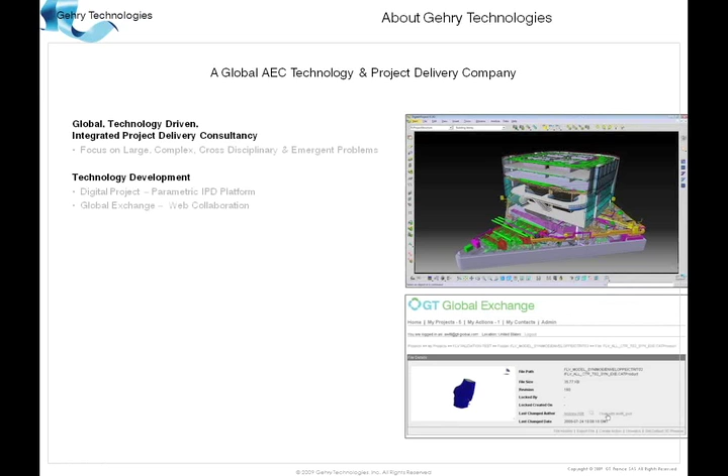We develop some building information modeling technology and communications software, and then next we are involved in both academic and industry initiatives, serve on some of the panels regarding interoperability, and try to foster the community of collaboration around AEC and BIM. Next.

Our processes tend to be a hybrid of consulting and services, and we're always looking to define the systems underlying complex project delivery problems, and we approach that through, again, hybrids of our software, other commercial software, and consultancy, both technology transfer and also integrating in the project team. And I think the World Trade Center work is going to be a good example of that kind of approach. Next.

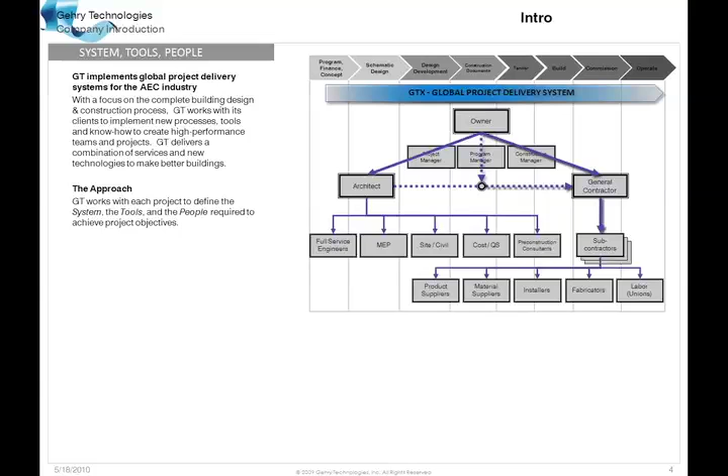Just briefly, we serve our projects through a broad international presence. So, of course, due to the international flavor of many projects, where design may be conducted in New York or Paris or London, but actually executed in Asia or Abu Dhabi or the Middle East, that's really one of the strengths of our approach, to be able to cover the world and the cross-disciplinary and distributed project teams.

Just some of the sectors that we're involved in. We're relatively well known for work on the complex building types, including our heritage, the Frank Gehry work, but also many other projects, including what's shown, the Beijing Olympic Stadium. We do other large commercial projects, as shown on the right, large infrastructure, often mixed use, where there are complexities either of scale or performance or

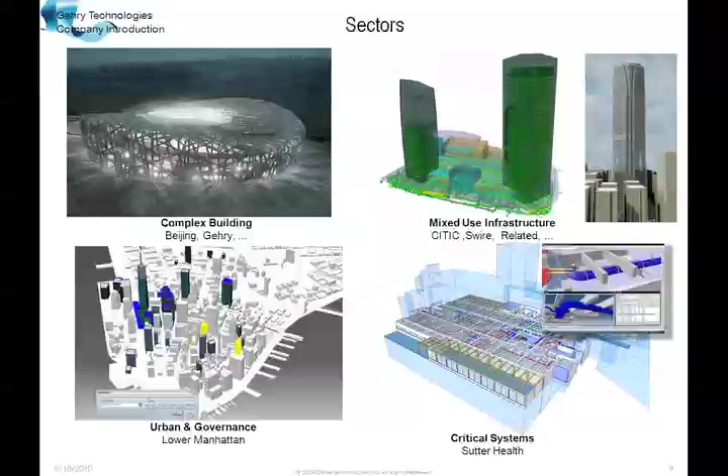geometry. We've been getting involved also with some of the more critical systems types of projects, hospitals, data centers, and the like. And then at the larger scale, again, what we'll show you regarding the World Trade Center work is really trying to take BIM to the urban and global level, and some of the overarching governance and management issues around it. Next.

And then downstream, project controls, construction logistics, sort of virtual design and construction work. And then always looking at the overarching governance and information management side of things, really sort of managing the data through the integrated project delivery ecosystem. Next. That's all I have.

I'd like to turn it over to Tarek, who is going to focus in on one of the projects we've been involved in that we're very excited about. I want to also, just in passing, thank FIATECH for the opportunity to speak today and for recognizing this work as you did in March, and also clearly our sponsors at the LMCCC and the very broad set of collaborators in New York City that we're working with to undertake this work. And with that, I'd like to hand things over to Tarek, who's going to take us into the case study itself.

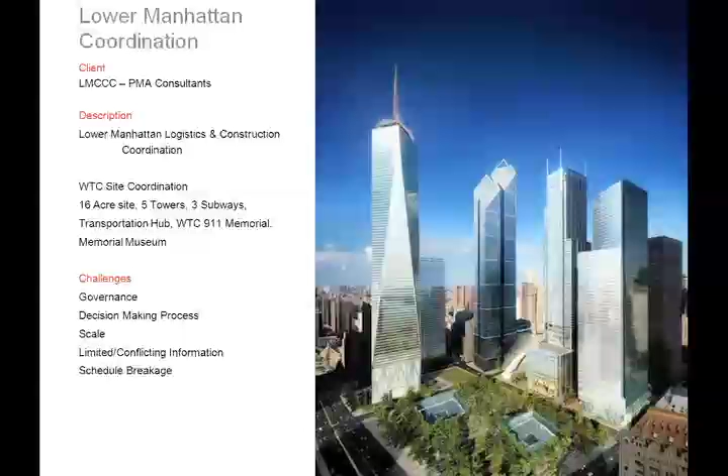Our client at the Command Center is the Lower Manhattan Construction Command Center, which was chartered by the executive orders from the governor of New York and the mayor of New York City. Its mission is to coordinate and communicate and mitigate impacts of construction on the community and amongst the construction community as well.

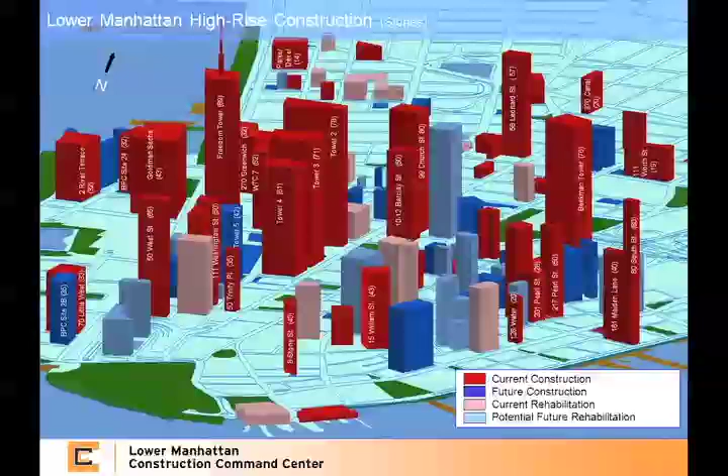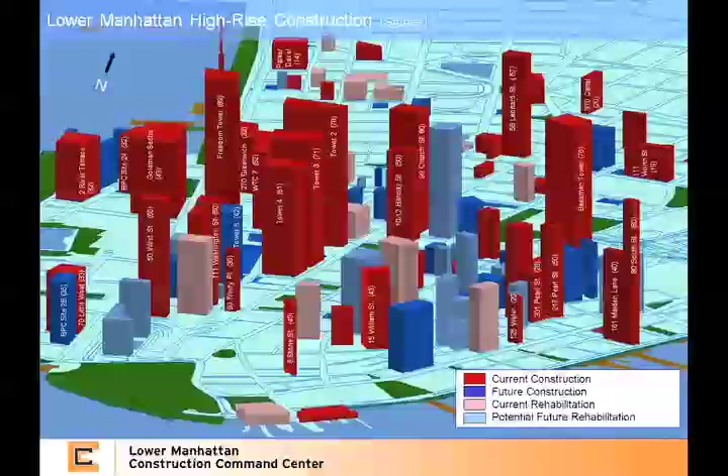Since 9/11, the flow of public investment in redeveloping Lower Manhattan, a lot of private funding as well, funneled into Lower Manhattan. From 2002 to date, there's about 150 new construction projects. Some of them have been slowed down due to the economic crisis the last couple of years. But what you see here in red is basically current construction projects in Lower Manhattan,

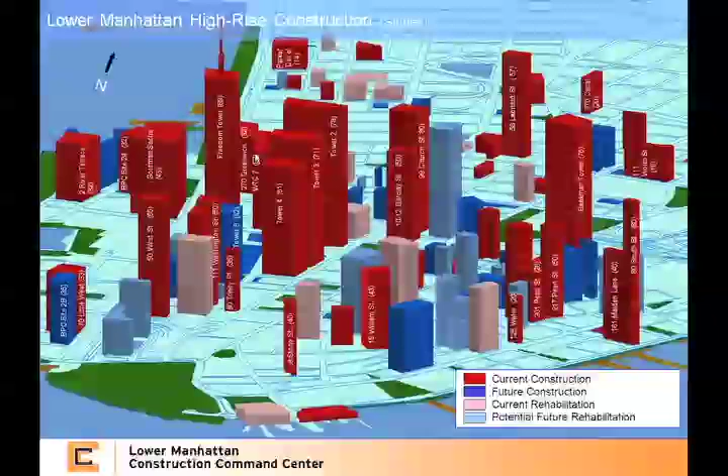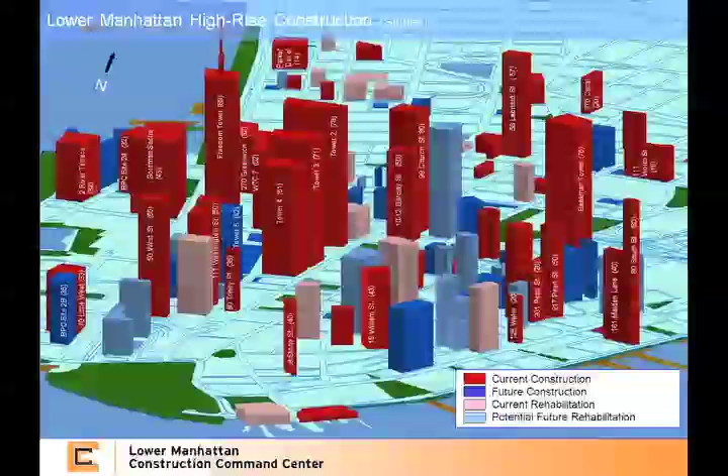and that's all around the World Trade Center site. If you can see my pointer, this is the location of the World Trade Center site, which is shown by the Freedom Tower, Tower 3, 2, and 4, and in between here, within the 16 acres, is also the Memorial and Transportation Hub that the Port Authority manages.

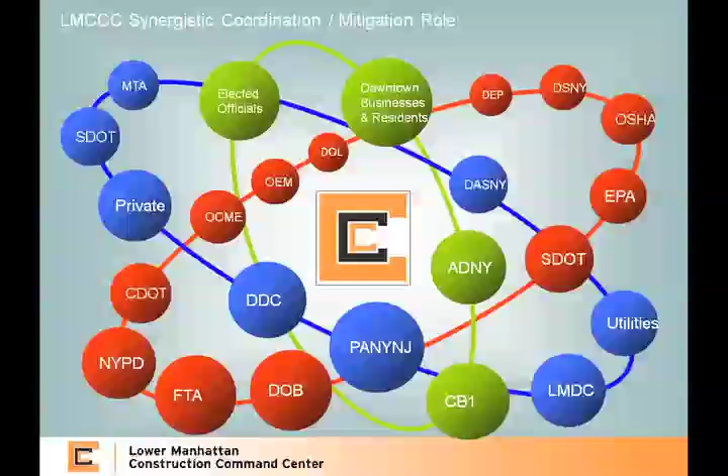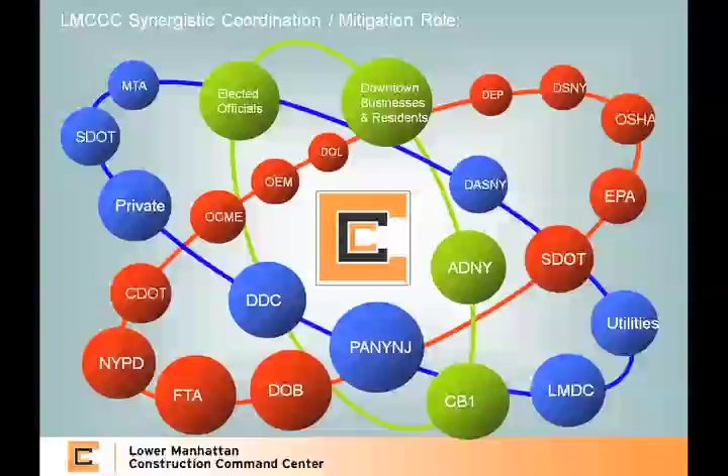The Command Center basically deals with 3 spheres of influence. What you see in red is the regulatory agencies that are involved in Lower Manhattan: State DOT, EPA, OSHA, DASNY, DEP, the FTA as a funding agency. What you see in blue is the construction community in Lower Manhattan. That includes the DDC, the Port Authority of New York and New Jersey, the Lower Manhattan Development Corporation. You have also utilities. The MTA has major projects, the state DOT, and the private.

A very quick review about risk management and its importance in this case. We're talking about the development at the World Trade Center site, which comprises about 16 acres and about $16 billion of program space. A quick review of all the mega projects. You can see there's a major cost overrun and schedule delays on these mega projects, and there are systematic and systemic characteristics in mega projects that are conducive to risks. Usually there's more than one stakeholder and there are multiple funding sources, which we see at the Trade Center site.

There are multiple programs and projects that coincide in space and in time. Within these programs and projects, there's multiple sub-projects, and the design is being packaged and developed at different stages and different timings. There are many contractors, construction logistics, and on-site, the interfaces between the contractors become very crucial.

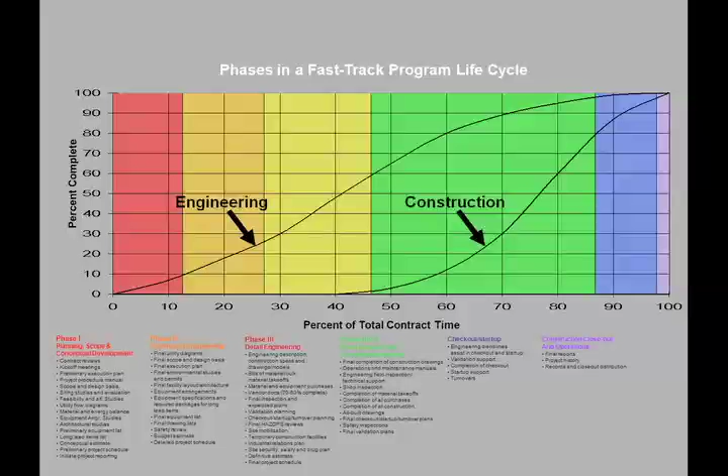There's fast tracking, packaging, early works, construction on piling or foundations, excavations. Slurry wall begins before completion of design. Then you have all the existing utilities and relocations and all that. A quick review of the life cycle of risk on a project. At the beginning of any project, risks are very high, but the amounts invested and the amounts at stake are very low.

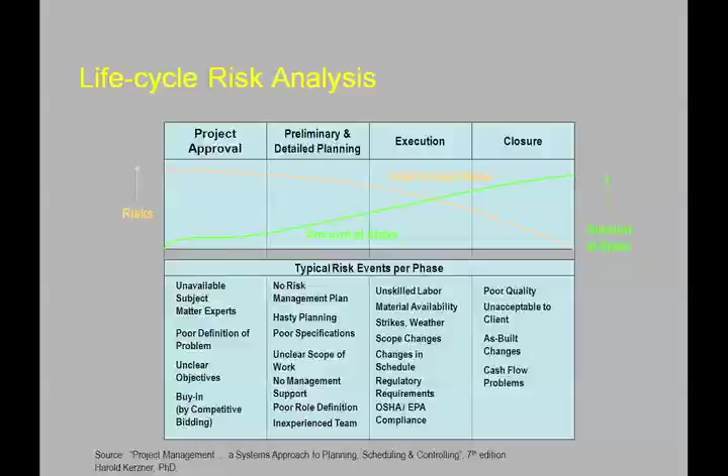On a program like the World Trade Center site with multiple agencies with varying timelines for the different projects, it's very critical. Early on, the Lower Manhattan Command Center adopted a risk management approach to the projects, identifying the project coordination risks, and basically it's a 6-step process with reviewing projects, identifying potential risks, modeling these risks for analysis, and then creating risk ranges, and we'll talk a little bit about that.

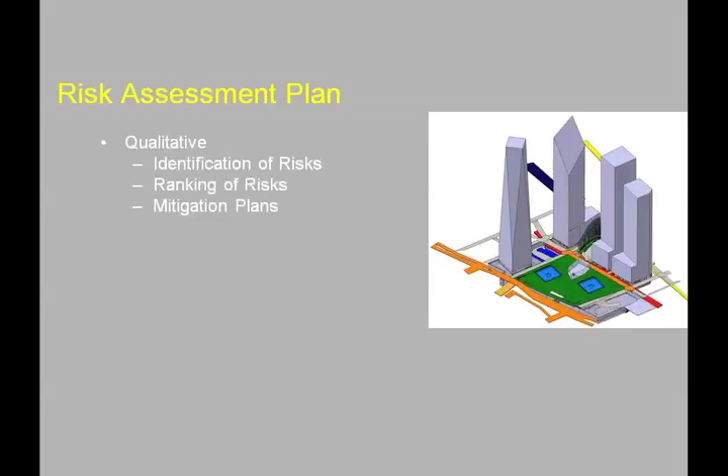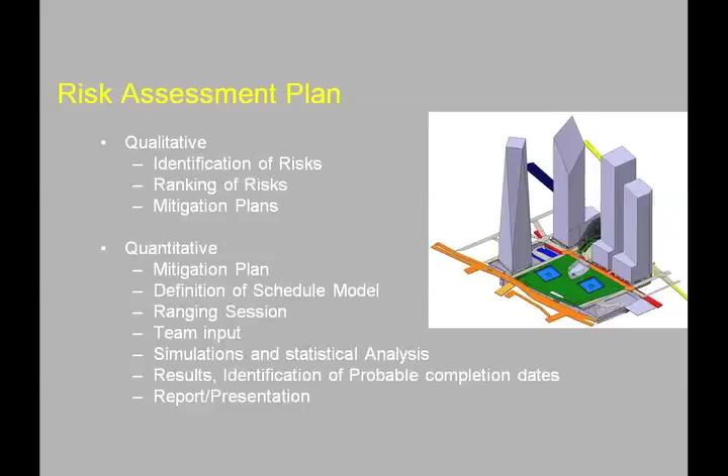Then we simulate and run the analysis and calculations and summarize the outcomes and results and basically manage the risk process. There are two aspects of the risk assessment plan. One is the qualitative aspect, identifying the risks, ranking them, and developing mitigation plans. The other is a quantitative assessment, which includes creation of a schedule and cost model, ranging these costs and schedules, and then, while soliciting the team's input, creating simulations and statistical analysis for these results, and then reporting the process.

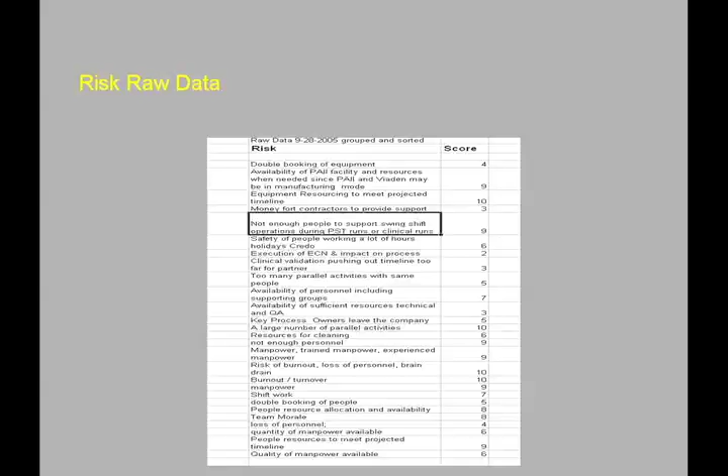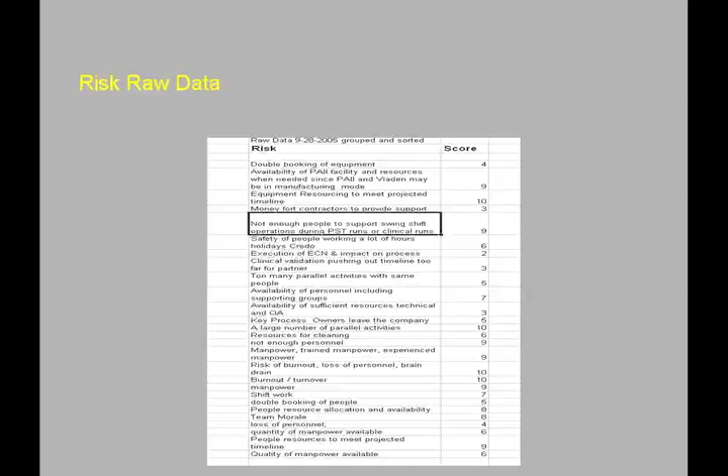Typically, we start with raw risk data. Basically, the team provides input on their potential risks. Now we're talking about multiple agencies. Initially at the command center, our expert team of consultants working at the command center, and Gary Technology was one of them, prepared what the command center saw as major risks between the projects due to coordination and due to interfaces between the projects.

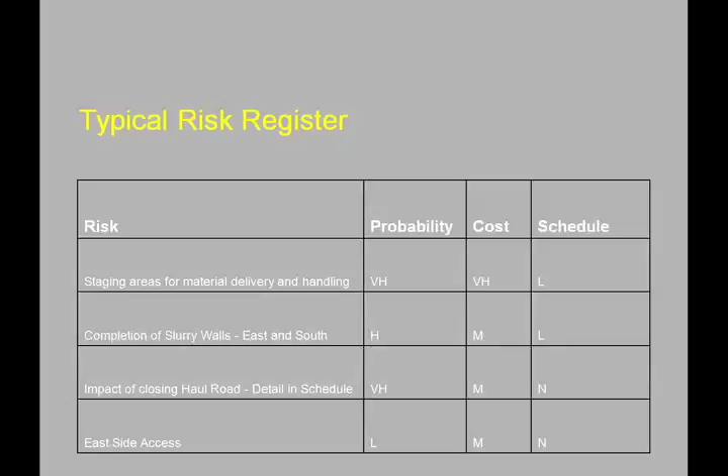A typical risk register would have a risk statement or a risk item with its probability and its impact on cost and schedule. These are basically subjective assessments with ranges. Probability is defined as very high, high, medium, low, very low, and the impact is also identified as very low to very high. And a score, and again, this is a very subjective scoring system, is identified based on the probability and the impact.

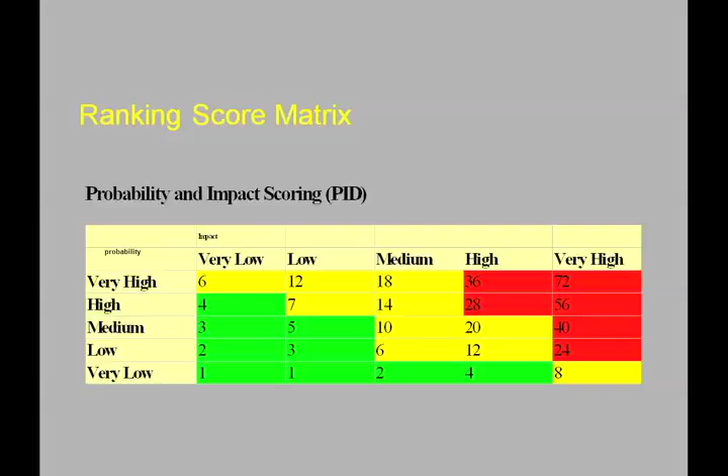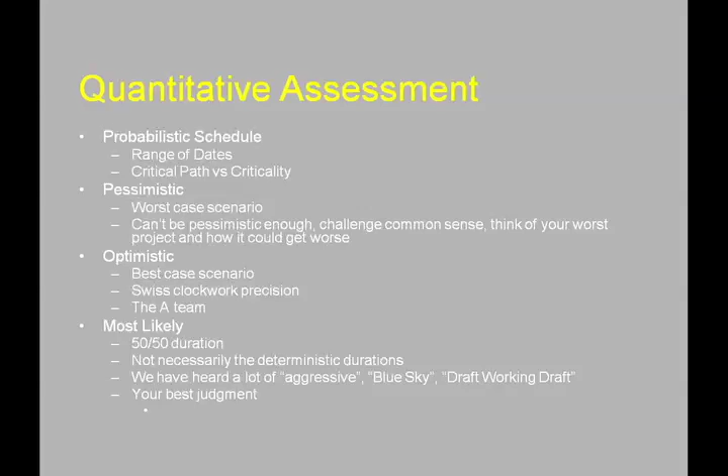One of the challenges we initially had was that the deterministic schedules were always qualified as aggressive. Some of them were blue sky schedules, drafts, working drafts. Basically, another way of saying this is very optimistic or very aggressive. So we had to deal with understanding what really went into activity durations.

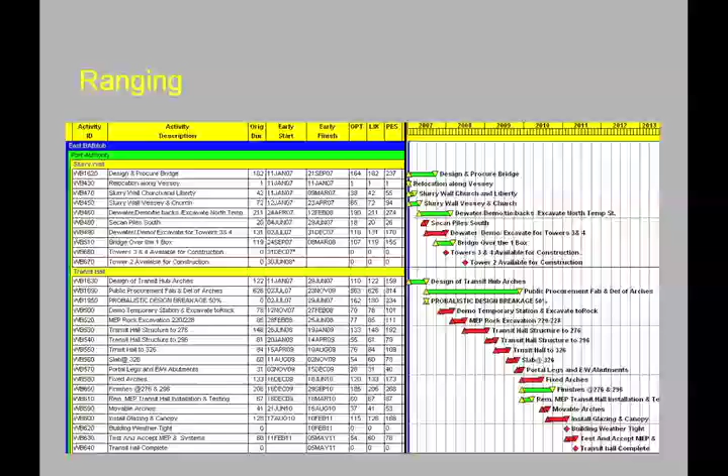The command center started analyzing the schedules and looking at the activities, providing these ranges, from pessimistic to optimistic and the most likely. And a Monte Carlo simulation basically randomizes schedule calculations, and we can run the calculation maybe 1,000 times, 10,000 times, and based on that we get a range of probabilistic dates.

Some of the dates have 100% probability, which are towards the tail end of the curve. Activities that have very little chance of happening are at the front of the curve, and in between is what would be the deterministic schedules or the standard schedules the projects are working with.

We have defined 80% probability on this project as the criteria for defining the amount of risk that is acceptable. So when we use the term P80 or probability 80%, this means that for a given activity or for a given project, it has a likelihood of occurring on or before that date 80% of the time.

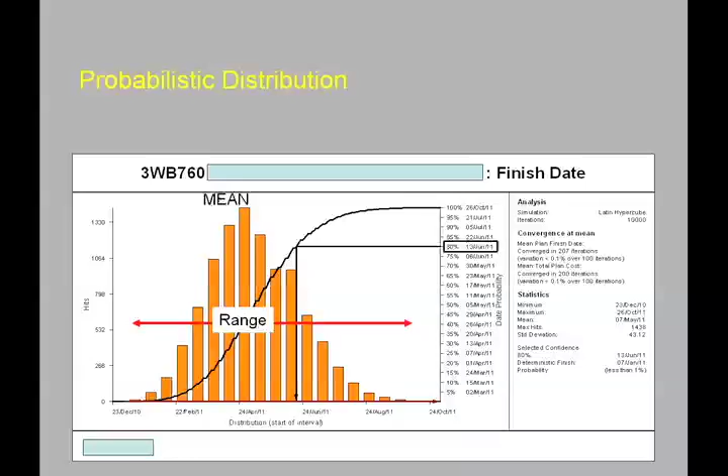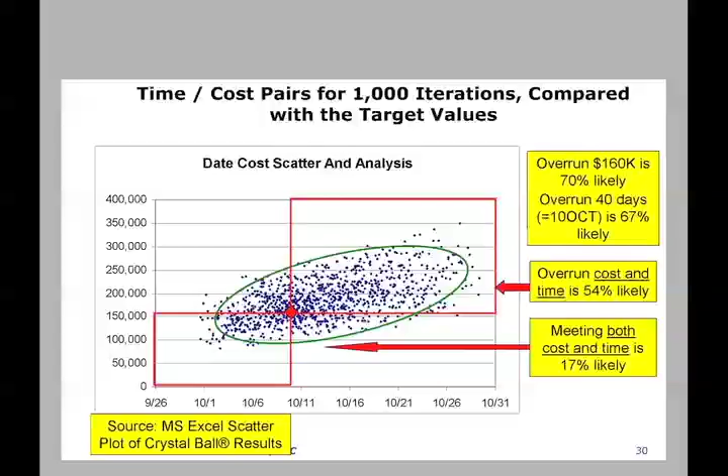So let me take you back in time to basically around 2006, and discussions were going on in 2006 forward, looking at what the site would look like on a memorial event in 2009: what kind of celebration, what kind of access to the site, what kind of construction status would the site be in. And that was a question posed by the governor and the mayor to the executive director of the command center.

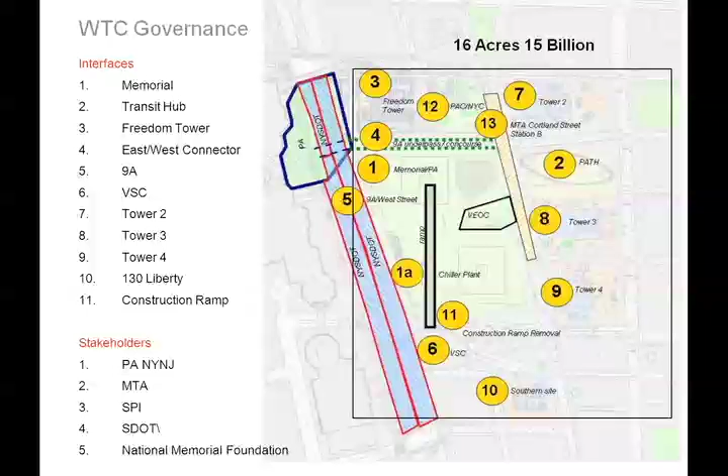And basically there were different responses from different agencies. There are about 13 major projects. There are 5 main stakeholders on the project. And we started looking at the schedules historically and how the schedule updates reflected the progress, and we analyzed a very simple metric of remaining activities on the schedules.

We had about 25,000 activities on the integrated master schedule for the program that is provided to us through the different agencies. And we created a summary of necessary activities, hammock activities if you want to call them, that basically represent the project regardless of minor design changes or modifications. And those were around 1,600 to 1,800. They varied slightly from one day to the next.

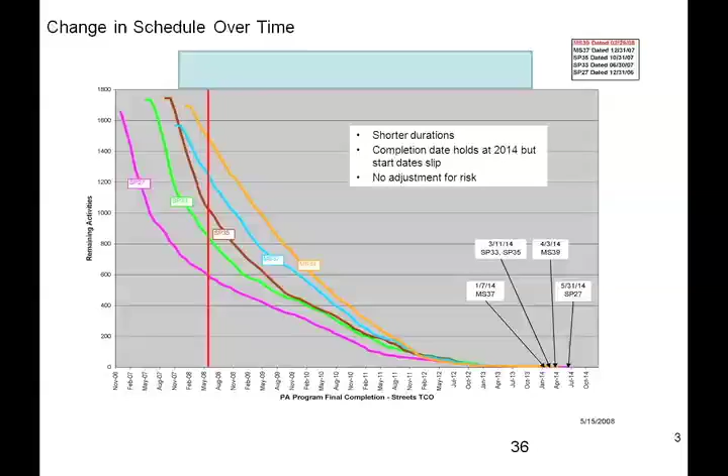And what you see in different colors on these charts are the different schedule updates. This was the schedule update, and then every 6 months we've tracked historically what has been going on. And you can see that the end dates on the projects were pretty much pegged on or around the same end date, but there's very little progress happening on the early activities on the project for almost a couple of years. This covers the period from 06 basically to beginning of 08.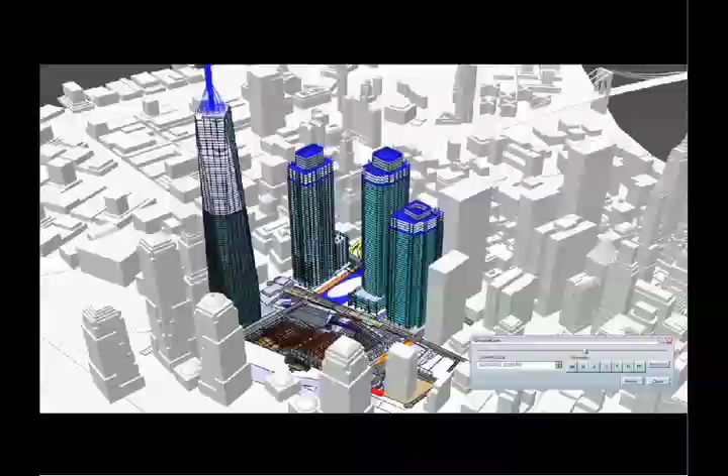What we initially started doing is creating a 4D model of the entire schedule as it is, as provided by the agencies, and analyzed the schedule. We used this model basically as a diagnostic tool. We've looked around at every corner on the site. We looked at the different interfaces between projects, and we tracked those areas in time to see what's the implication of construction at the different stages.

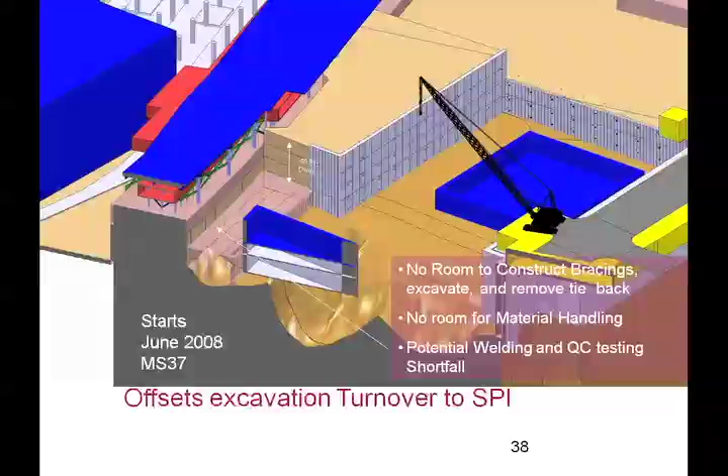So this is a look at the southeast corner of the site. You can see the MTA box, you can see the Silverstein site, and you can see the interfaces between. And we track the same location in a different view, looking at how excavation work proceeds on the different sites. They're basically separated by a fictitious line that runs around here, and you can see different projects running in different phases.

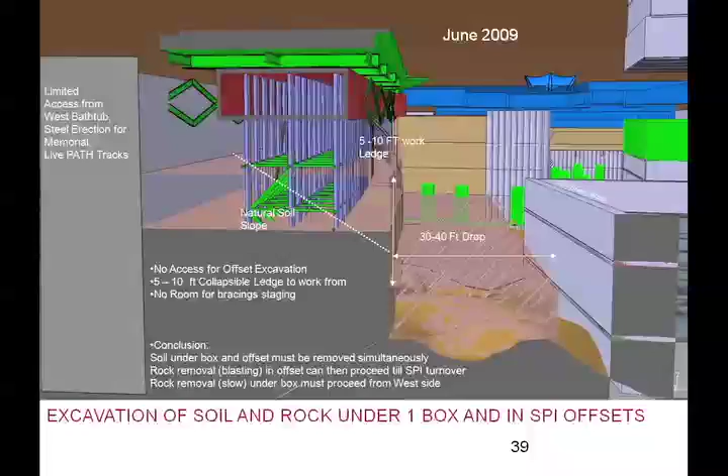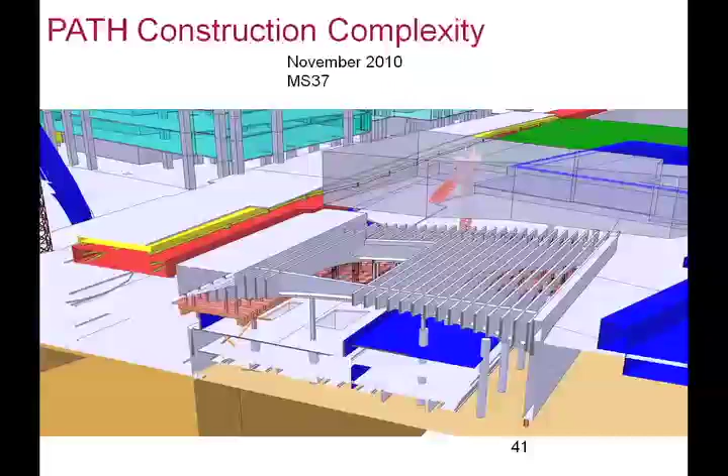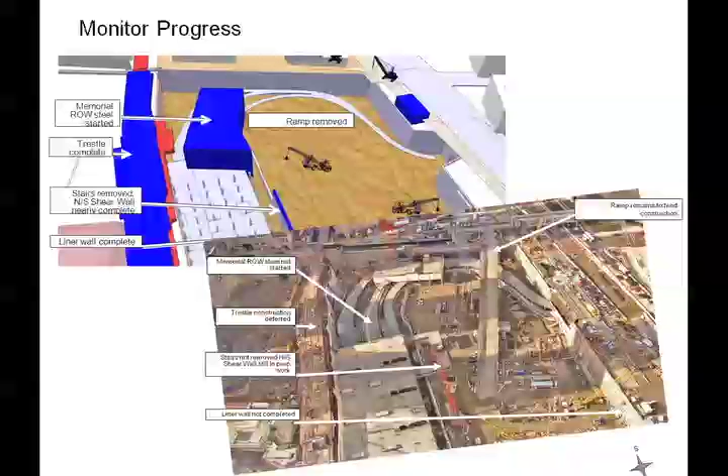And each of those images identified certain risks on the project. Some were interfaces between construction equipment and area allocations from one project to the other. Those are separate projects. We've also used the 4D model to compare actual versus planned at any given date, looking at the site from different perspectives, and identifying again what's holding progress behind. We've looked at temporary construction and phasing, and the impacts of the different projects on each other.

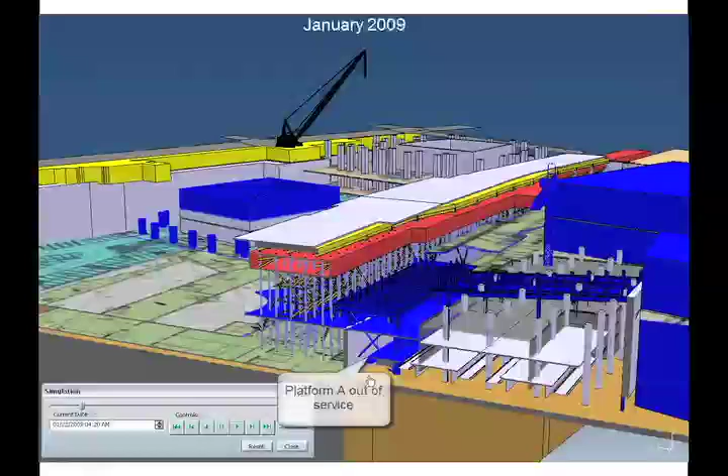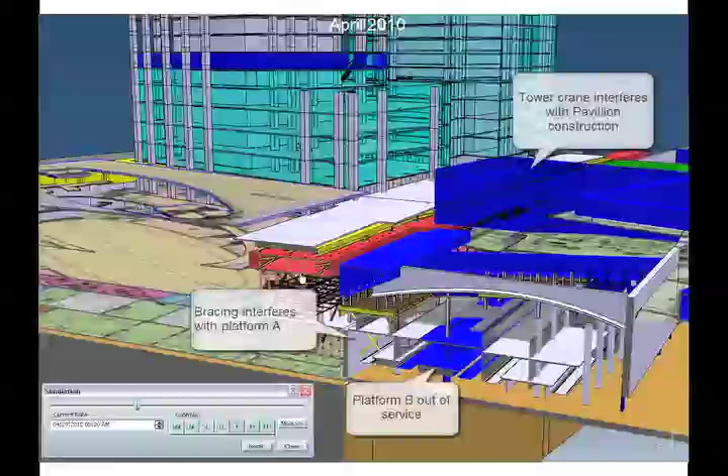Mind you, the World Trade Center development is occurring with two active subway systems, with the PATH running from New Jersey, carrying about 67,000 passengers every day, and the One Line subway, which you see here in red, carries about 22,000 passengers a day. There's no station on site, but it runs across the site from Chambers to Rector.

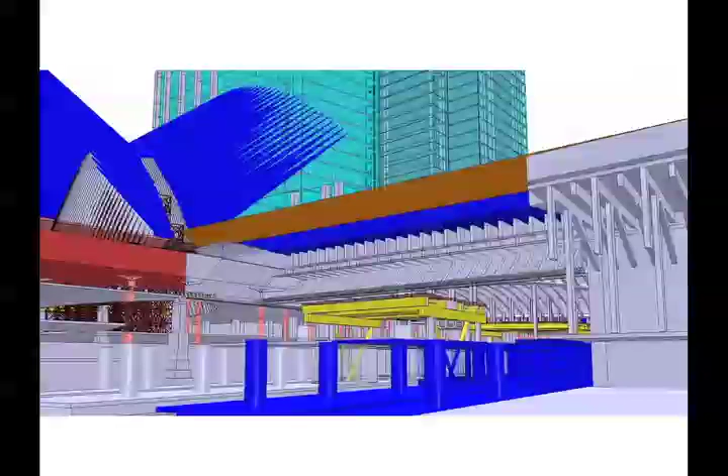Looking at different temporary conditions, temporary construction, we started analyzing these images and came up with kind of a risk register for the command room. And the idea was to actually have an intensive 2-week workshop, bringing in experts from around the world to look at the project, analyze the risks, come up with a risk register, come up with a risk assessment, also evaluate the schedules, and come up with potential mitigation plans.

All of this within a decision framework that basically looks at the preliminary interfaces between the different projects, runs a schedule and cost risk analysis, develops mitigations, workarounds and trade-offs, and calculates regional costs, benefits, and intangible impacts. In the first week of the workshop, develop the model interdependencies and schedule likelihoods. In the second week, develop mitigations and model those mitigations, come up with different scenarios and likelihoods, and then use that as a risk management process that continuously looks at the site and is updated periodically, which we continue to do until today.

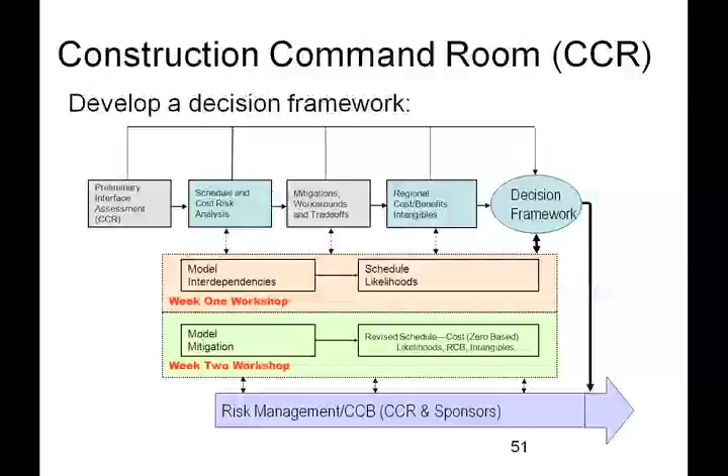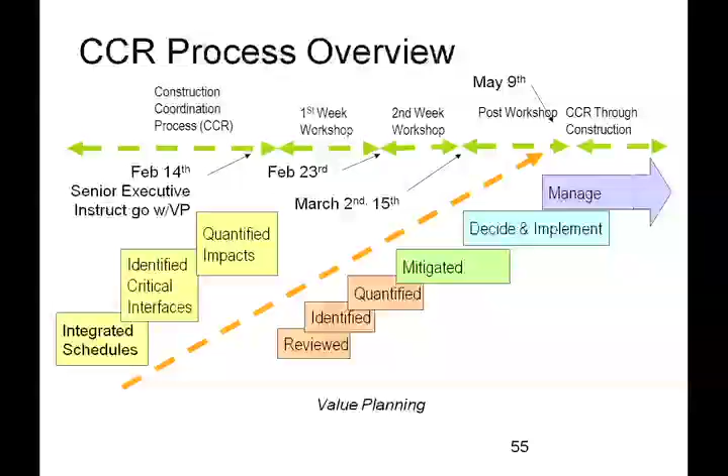This initial workshop was conducted, as I said earlier, in February of 2007. And basically, we looked at the project schedules.

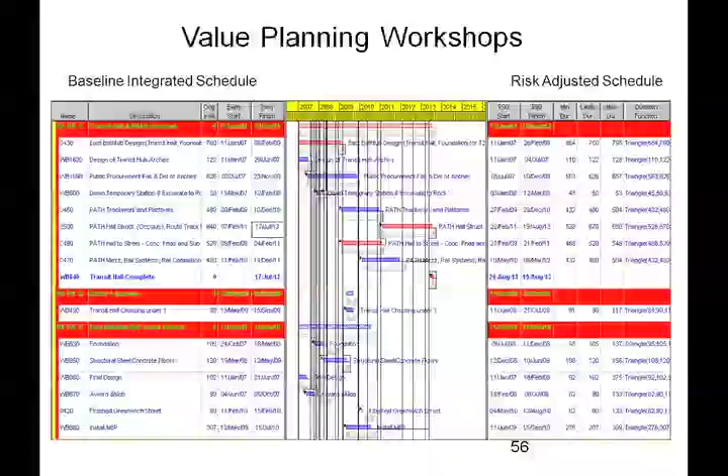The expert team provided, utilizing the BIM model, the 4D was available for the team, and it facilitated the understanding of the risks. So at any point, we'd look around at any given date where people are looking at a certain interface in the future, analyzers rotate the model, play with it, and provide input.

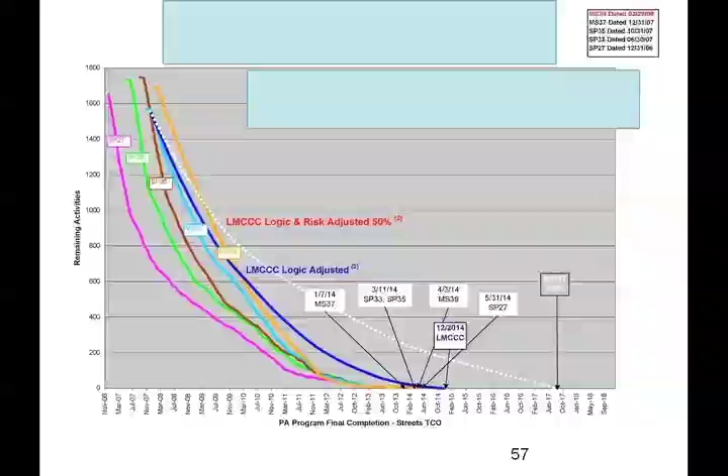A result of this risk workshop was the dotted line, where the pre-mitigated logic and risk-adjusted schedule. That has since been mitigated, so this is only a reference chart. And we came up with different, utilizing the Monte Carlo simulation. We randomized the schedule for about 1,000 iterations and got the risk distributions basically for every component of the project.

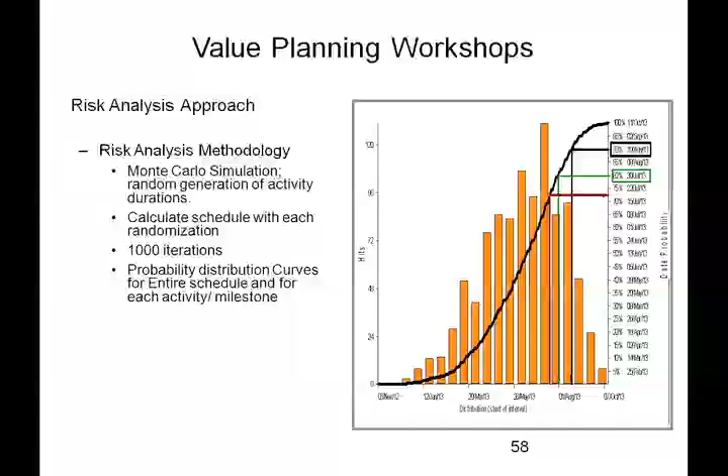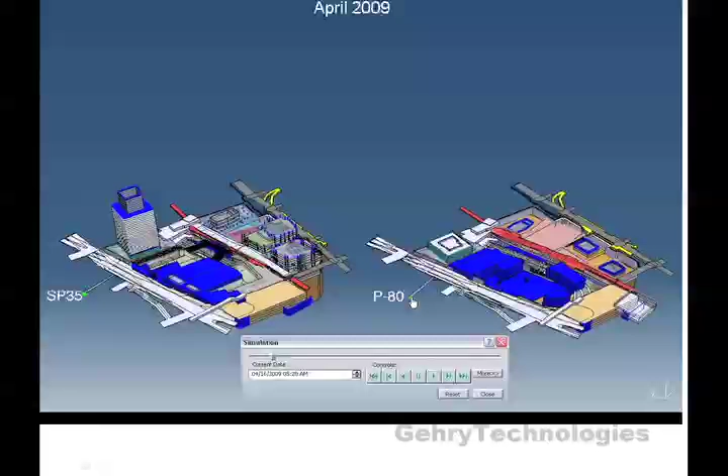What we were able to do during the workshop is create and allow the expert team to look at basically two instances of schedules. One is the baseline schedule, if you may, which you see on the left, and the other one is a P80 schedule, which is basically a probabilistic schedule with 80% chances of materializing. And that schedule has identified and corrected logics that are based on the risks that we have seen.

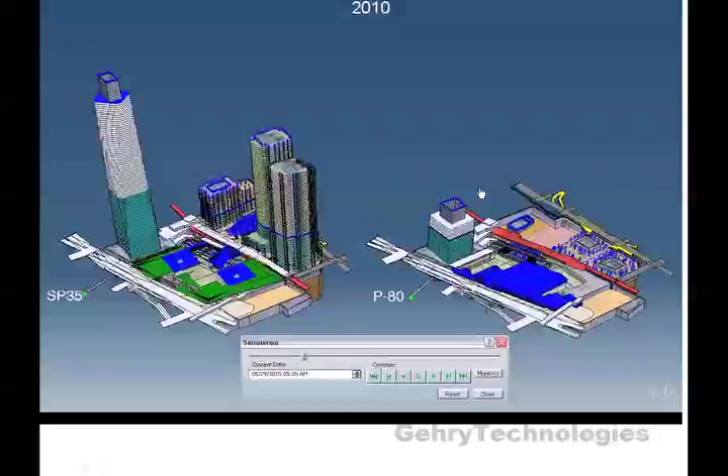But it's pre-mitigation, right? So it's a pre-mitigated schedule, and you can see this simulation running from early 2008 all the way through the completion of the project. What is very interesting here is you can look at a frozen moment in time in December 2009, which is a few months back, and comparison between the baseline schedule back in 2006 with the P80 that was developed in the workshop in early 2007.

This projection or forecasting of the project status is almost 3 years old, and I'm sorry. These were pictures of the site taken in December 2009, depicting where the site progress is, and it is very much consistent with the risk management workshop.

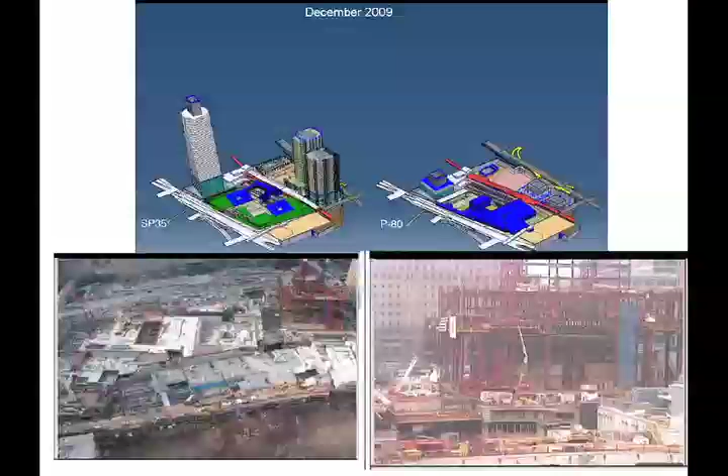Since then, we've continued with the risk workshops. We've updated. We've continued to manage to that initial workshop through 2007. In 2008, we updated the risk assessment in March and again in June. And based on that, the Port Authority has adopted in October, based on also the risk assessment that they've conducted, which came up with very close results. They've created the new roadmap for the project development and project schedules, which are currently now being tracked.

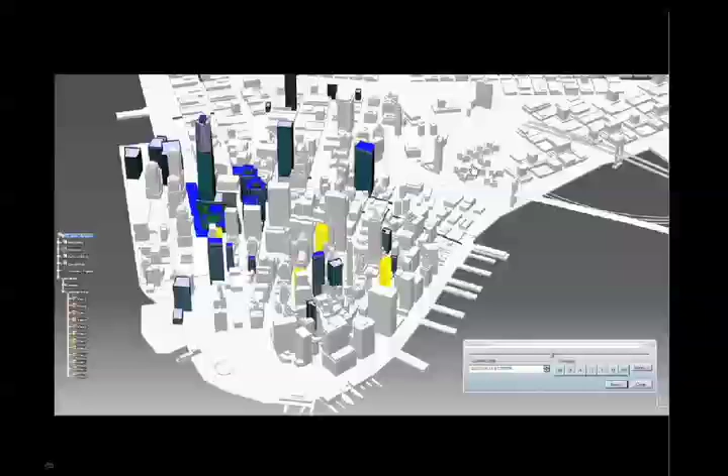So putting things back into perspective, the command center is utilizing BIM and 4D in coordinating construction projects in Lower Manhattan, and you can see at a very high level. But also we're utilizing this information on the web. A lot of this information is readily accessible on lowermanhattan.info, where we are now updating what used to be a GIS map of the project. We're updating it with Google Maps, where we are going to have 3D and 4D projections of where major projects are.

Provided information is suitable for public consumption. A lot of the development in the World Trade Center site is confidential and privileged, so some of the progress may not appear on the World Trade Center site, but all the other projects in the vicinity are being tracked, and they have been tracked for the last few years in time. What you see here are the different projects, street projects, street changes. Each project has a different coding and a large database behind it.

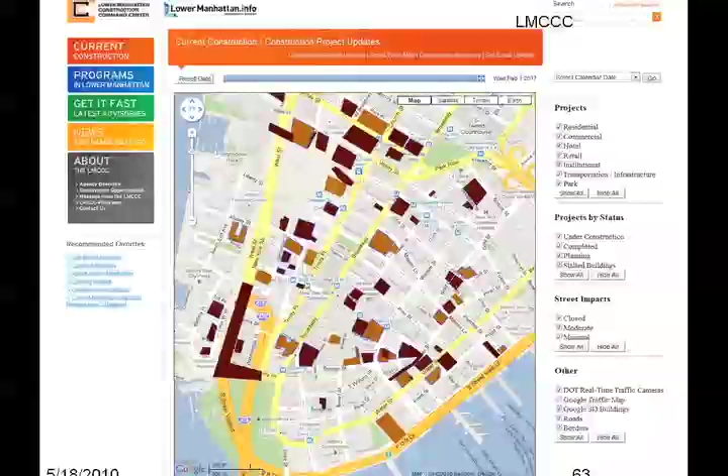You would be able to get some brief data about the project, description of when it started, when it's ended, even the permitting status of the project, who is building it, who is the contractor on site, and so forth. Now that's being taken into the 4D world, and it should be launched very soon.

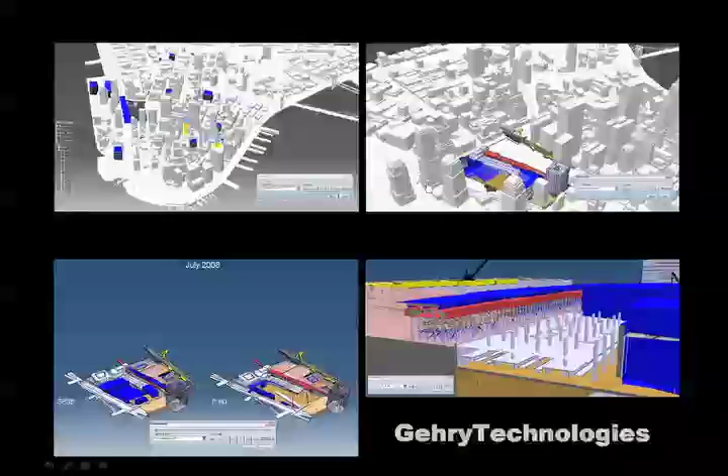So from a very global city view of what's going on to detailed construction logistics and temporary construction and crane movement, we have utilized the BIM, or the Virtual Design and Construction tools, to basically manage project risks and help mitigate interagency coordination problems. And that pretty much concludes my presentation, and I'd like to open it for questions and answers.

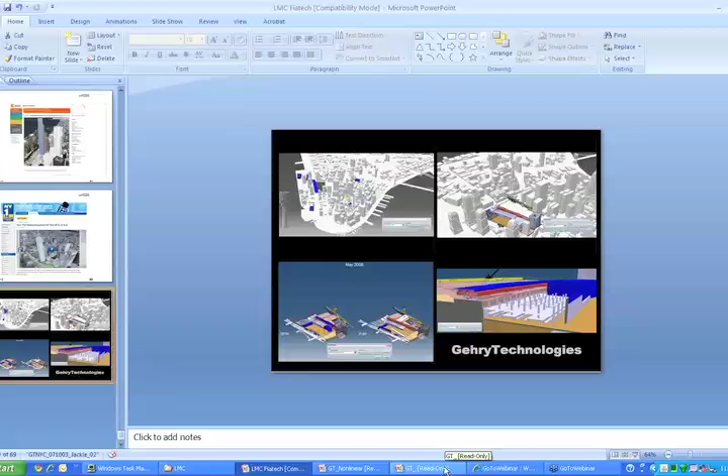Well, yeah, it's fine, Tarek. So that's a question that sort of always comes up, and I guess the question then is, what do you consider small? These sort of techniques have been used with, I'd say, mid-sized, mixed-use commercial construction, and of course, even residential construction is appropriate if you consider work at the development level.

I think it might, at this point in time, be overkill for single-family residences, but the technology continues to evolve. Things are getting easier and easier. The cost is going down, and I would expect that you'd see these sort of techniques applicable to increasingly smaller and lower cost projects. Tarek, do you want to add anything to that?

Yes. So in terms of the techniques, the risk management, if you've done a project 10,000 times before and you have your hands around all the risks on a project, these tools may be superfluous. But if you have even a small but complex project with potential risks that require early visibility, and by visibility I mean visibility to the stakeholders and the decision makers of the risk and a clear understanding of what these risks are, as well as visibility to the project team and the people who are responsible for delivering the project.

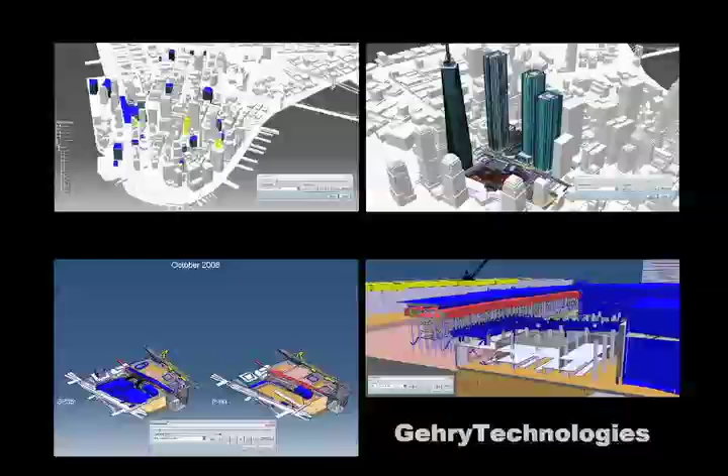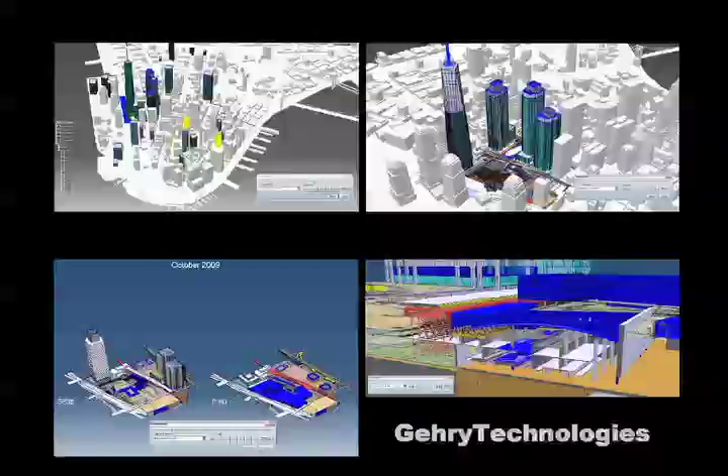As far as the 3D BIM model, it was more of a challenge. The entire model was developed by the Lower Manhattan Construction Command Center from data received from the different stakeholders. Some agencies had 3D models of some of the project components. We utilized those and integrated them either through IFCs or imported them directly into Digital Project. Some projects did not have 3D documentation, so we actually used the 2D drawings. Some projects were in early design phases, so we used PDFs that we integrated.

If you look at the bottom right of the model, you can see the floors of this program space, and these are actually images from PDF. They were not completely modeled. While on this side of the transportation hub, the temporary structures were even detailed from the design drawings. So there are different levels of model development that we had to accommodate.

Yeah, if I can just add to that, I think the question is really a pertinent one. The notion of how you can develop comprehensive integrated approaches dealing with widely disparate data is really central to the agenda of this project, because we are dealing with so many different stakeholders and so many different types, qualities and levels of detail of data. It is part of the mandate of the project, but also our aspiration as an organization to support federated data sets and to create this kind of synergy from data without requiring some unified approach that everybody has to adhere to.

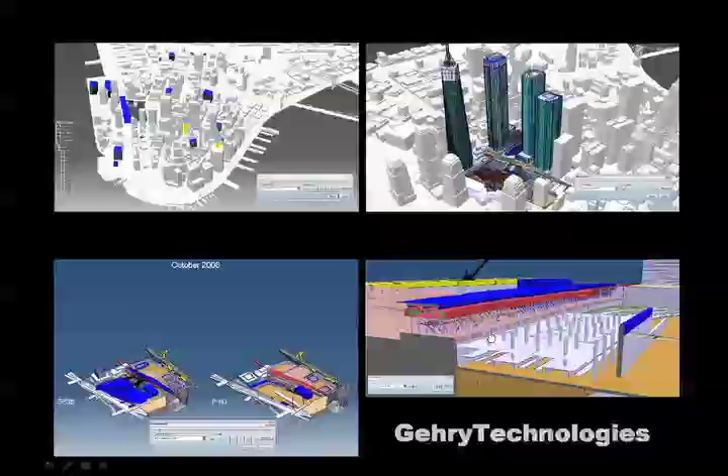In general, I think, on the risk management process, the input from everybody on the construction team, the design team, subcontractors, is of the utmost importance. In this case, we're looking at interagency interfaces and risks of delays due to these interfaces between the agencies. We did not look at specific contractors' means and methods unless they impacted another agency's scope of work.

I hope I answered that question. Thank you. Thanks. Next question. Reference was made to a decision-making framework on slide 51. You mentioned the quantitative and qualitative categories for decisions. What type of and how is strategy involved in the decision-making process, and does it include a choosing by advantages system, for example?

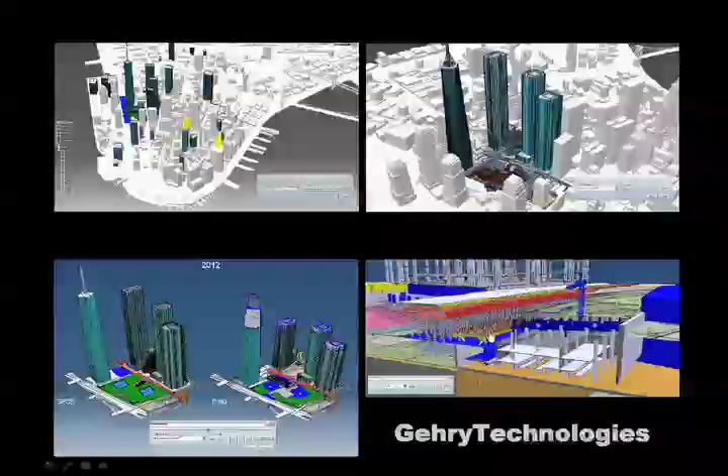So one of the outcomes of the initial workshop and setting up for the decision process is what we call scenario-based optioneering, in which we utilize the visualization and the BIM model to model different scenarios. If decisions A, B, and C were made, this is what the schedule impacts are, and this is how it would flow.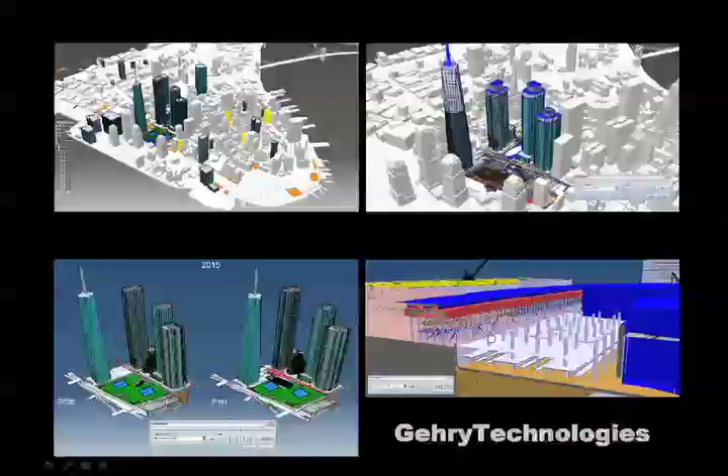These options then were evaluated in terms of schedule impacts and cost impacts, and then on a secondary level, we had different consultants and experts, financial and economic consultants as well, who developed a model for evaluation of regional cost-benefit analysis for each of the options. So basically for each mitigation option that was developed based on the risk workshop, there was a direct cost and schedule impact of the mitigation, and there was a regional cost-benefit analysis for each of the mitigation scenarios.

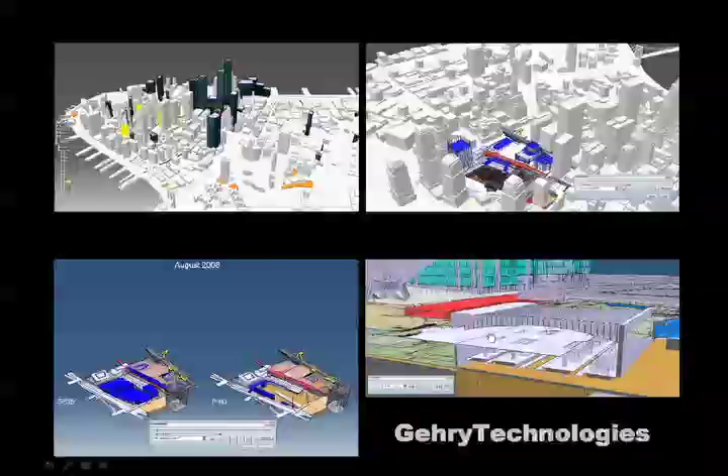Thank you. Next question. Do you make virtual visits with stakeholders where you can navigate through the model at a specific point of a project? Continuously. The command center has what is called the CCR, the Construction Coordination Room, and basically every week it's meeting with the stakeholders individually, or sometimes if there's an issue between two stakeholders, utilizing the model. The model is always updated and maintained in the CCR, and the agencies come in and we facilitate, utilizing the model and the schedule, the coordination issues every week.

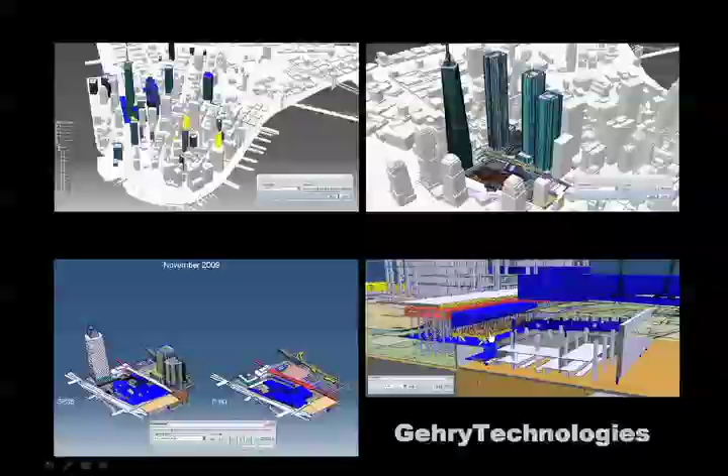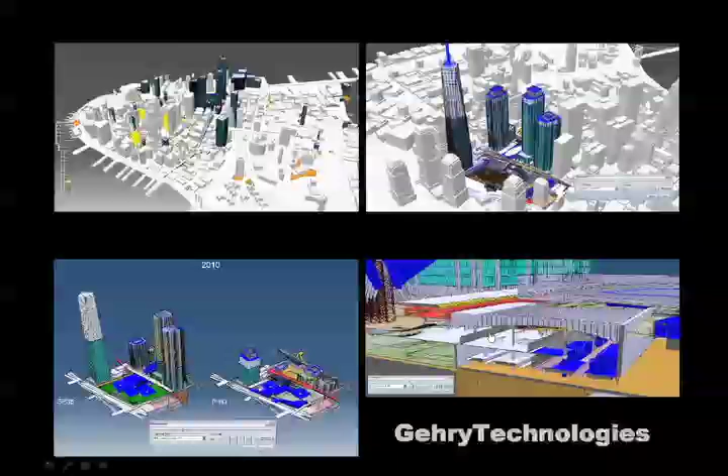Great. And last question. Do you support, or does Gehry Technologies support, standards activities to achieve the enterprise-wide integration that you need? And if so, which ones? That is certainly the question. I'm assuming probably there's IFC, Industry Foundation Classes, with buildingSMART Alliance. Within FIATECH, we are looking at the advancement and acceleration of ISO 15926 for capital projects and process plant industries. Are there any standards that you're aware of that you're working with to achieve the interoperability integration that you're getting?

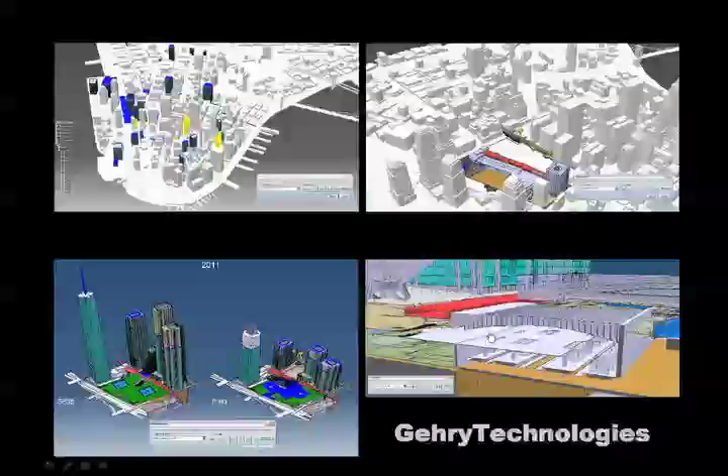Right. So again, Gehry Technologies is really oriented towards an open standards and a federated way of approaching data management. So we are strong proponents of IFC. We're members of buildingSMART. We participate in the leadership and guidance work that's done there. And the technologies that we use and develop are natively IFC. They're built on the IFC object model.

As you saw, maybe not so much in the open standards, but what you saw toward the end is really about developing broadly distributed and integrated databases for project information. I can't say that we're all the way there, or that anybody in the industry is all the way there, but that's really core to our mission, to approach projects from an open standards way of integrating federated information.

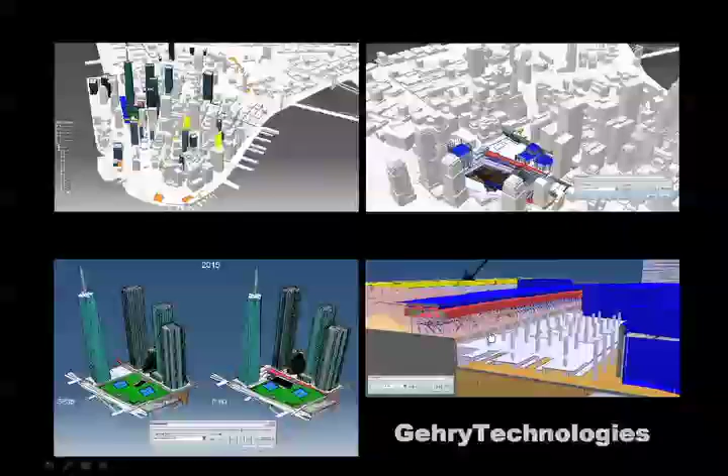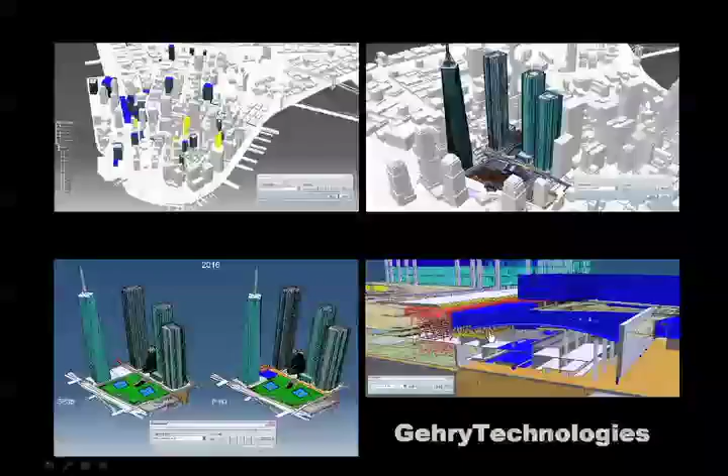Okay, and actually the last question that just came in kind of dovetails that point. They said, getting back to modeling platforms, don't you think that there's going to have to be the development of some broadly accepted data format in order for these technologies and methods to gain widespread use? Absolutely, and our orientation is toward IFC. You have a fairly well-informed audience. So there's certainly a lot of debate about whether IFC is good enough, new enough, but it is, in our view, a great common denominator, and I'm sure it'll continue to evolve. We're promoting and encouraging IFC as an interoperability approach for everything that we do.